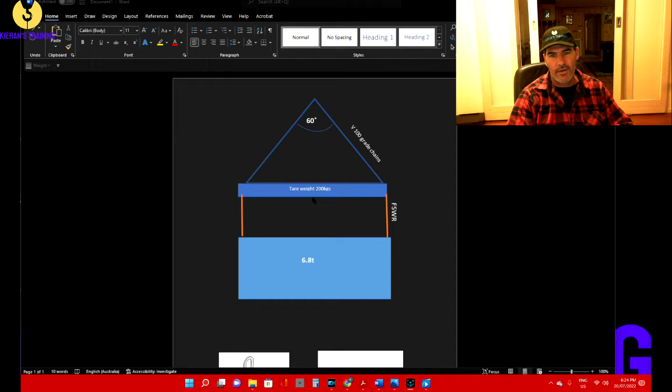Alright, here we go. So, in this scenario we've got a spreader bar lifting a load weighing 6.8 tonne. We've got two flexible steel wire ropes underneath the spreader bar, and we've got some 100 grade chain above the spreader bar at a 60-degree angle. So the first one we'll take a look at is the flexible steel wire rope. Now the thing with the spreader bar is if you've got an evenly balanced load underneath it, each side is going to be taking half of the weight. So if we're lifting 6.8 tonne, that means each of these flexible steel wire ropes need to be capable of lifting 3.4 tonne.

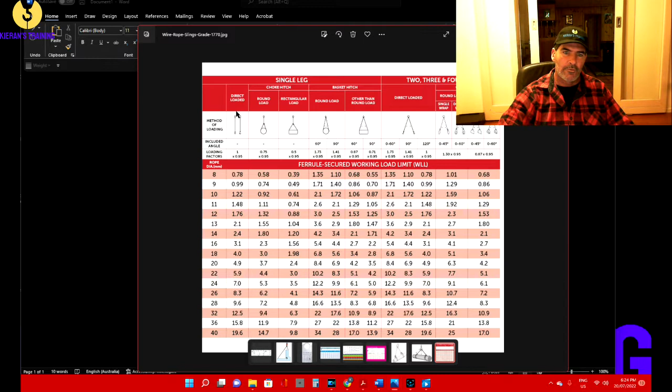So to look at the sling chart to do that, I'll just drag that sling chart across here. So if we look here, it's direct loaded because it's not choked around the load. So just a direct load at the top. Two slings directly loaded, and we just run our way down this column until we can lift the 3.4 tonne. At 16 mil we're good for 3.1, not quite there yet. So we go down to the next one, so 18 mil here means we can lift our 3.4 tonne load. So in this instance we need a minimum of 18 millimeter flexible steel wire rope underneath that spreader bar. So that is the lower slings.

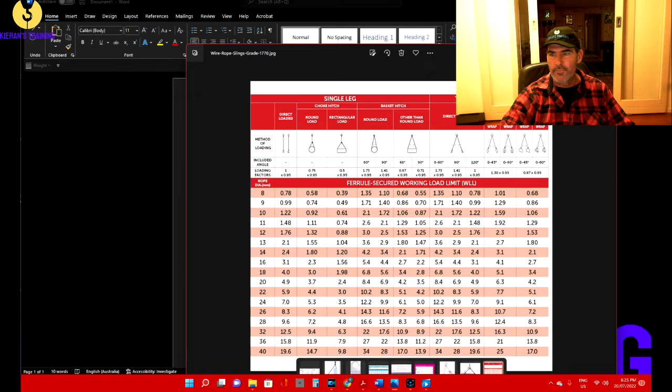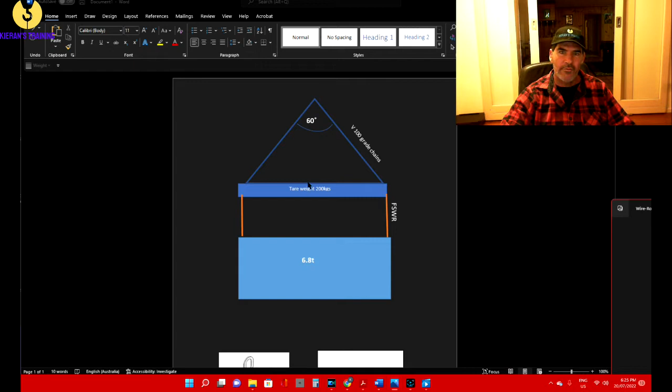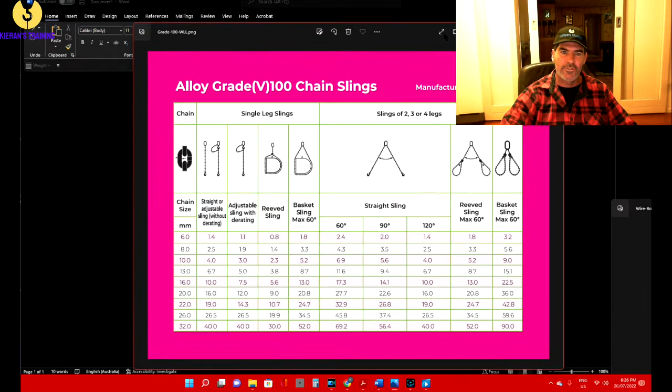So now we'll take a look at the top slings. 100 grade chain, 60-degree angle. When we're looking at the weight of the load, those slings are taking the whole weight. So in this instance we've got the 6.8 tonne load plus we have a 200 kilo spreader bar. So in total we have 7 tonne of weight on those chains. So to determine what chain slings we need, we'll look at the sling chart for the 100 grade chain. When we take a look at this chart here, it gives us a few different variations. In this instance it's directly attached because it's on the spreader bar, and we've got a 60-degree angle.

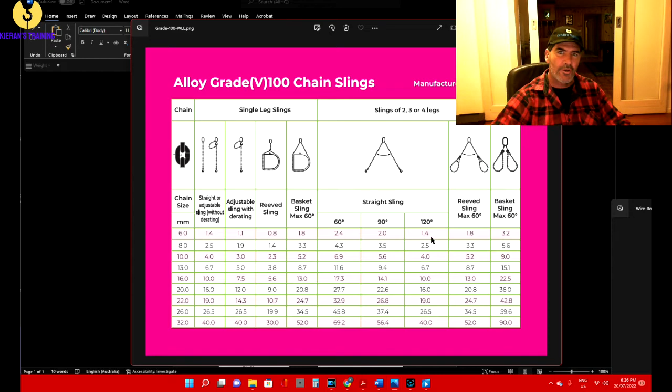So with the direct attachment you'll notice we've got a 60-degree, 90-degree or 120-degree. 120-degree being the maximum allowable angle between two legs of a sling. Now over here where you've got reeved slings, you'll notice it only has 60 degrees because if you have your slings choked around the load, 60 degrees is the maximum allowable angle. So we're over here, we've got a straight attachment at 60 degrees.

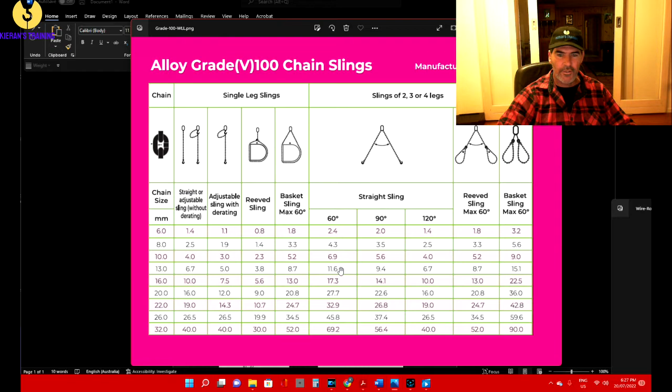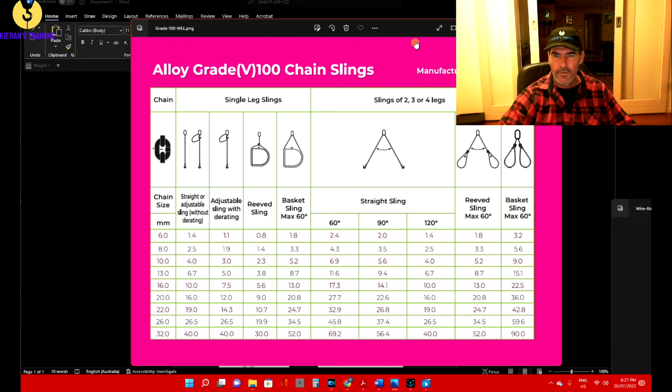So we just run down this column here, straight slings at 60 degrees, and we run down until we can lift 7 tonne. We can see the 10 mil can lift 6.9, so we're not quite there yet. So we go down to the next one, and our 13 mil 100 grade chain can lift 11.6 tonne. So the slings required to lift that load on top is going to be 13 millimeter. So it's nice and straightforward, that one. So we'll move this back over here out of the way.

To do that, if the pipe's 20 kilos per metre, you go 20 times 5, because they're 5 metres long, and there are 20 of them. So when you're working out the weight of the load, just multiply all three numbers together. 20 times 5 would be 100. 20 times 100 is going to be 2,000. So that equals 2,000 kilograms. Don't forget to put your unit of measurement on there.

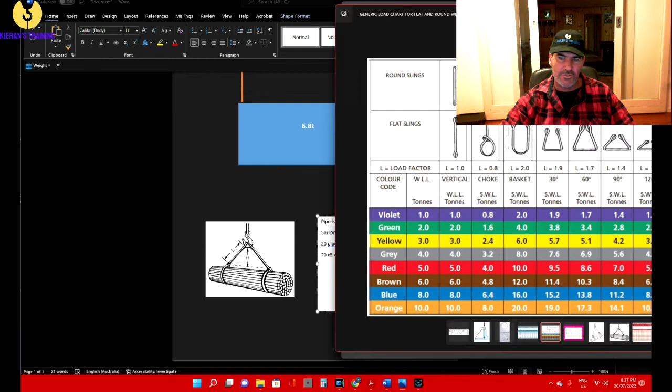So if we've got a pair of softies, and because it's choked, we know we're going to have a 60-degree angle, because we can't have any more than that. We've got to lift a 2-ton load, it's going to be choked, and that's 60 degrees. So we'll bring across our sling chart for the softies. You've got all your different variations along here. In this instance, we've got 60 degrees and choked, so we're looking right here.

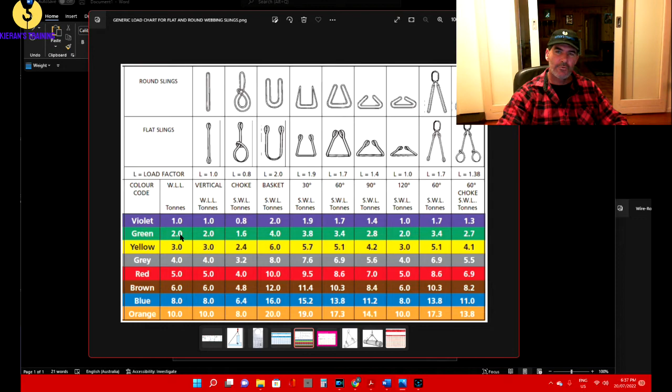So what size slings do we need? The 1-tonners can't quite do it. If we go to the 2-ton, or your 2 right here, we can lift 2.7 tonne. Slide back across, and that tells us they are 2-ton slings. So in order to lift this load, we're going to need a pair of 2-ton slings.

Now just take a look at this little diagram. You'll notice they've only got a single wrap on it. Just remember, if you are going to be slinging any loose items, always make sure you double wrap those slings, just to prevent the slings from slipping. If they're not double wrapped, you will find those slings will actually slide in on you. The load can become unbalanced and start falling out, which is never a good thing. So there's your softies.

Let's have a look at some chains. Let's just close that one off and see if I can find the right picture. Here we go. So when we're looking at a chain sling tag, if we've got this arrangement, let's say we have 90 degrees between the legs here on the diagonal. You always look for the greatest angle between any of your legs, and that's going to determine what angle you're going to use when determining the capacity of the chains. I will just find the, here we go.

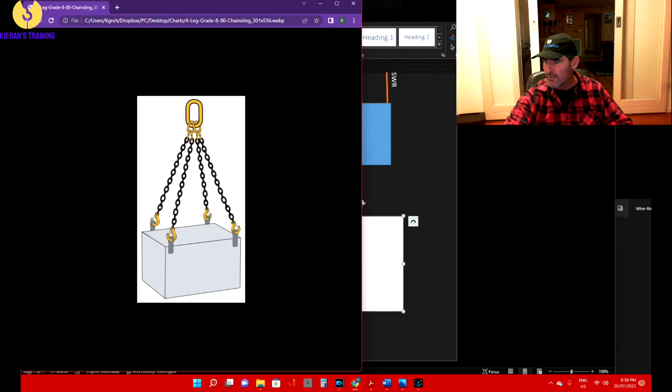So, I'll just put that to the side. Alright, so if we had 8mm chains directly attached here, and a 90-degree angle across it, then we're going to be looking at our sling tag to find out how much we can lift with those chains. So in this instance, you'll notice on a sling tag you'll have the grade of chain, so in this instance it's 80 grade. It's going to have the diameter of the chain, it's going to give you your different angle factors, and your choking factor if it's rigged around the load as well.

As with all lifting equipment, it's going to have a serial number or some form of ID on it, so you can put that into the lifting register and identify it. So 90 degrees, directly attached, means these chains can lift 2.8 tonne. If it was choked, you can lift no more than 2.6 tonne, because being choked, 60 degrees is the greatest angle that you are allowed to use. So that was just a quick look at the flexible steel wire rope, the synthetic and the chain charts.

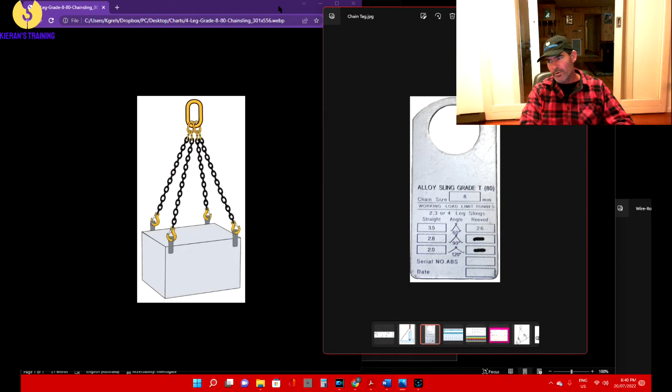I just want to have a quick look at if you're lifting something with different length slings or chains, to decide what angle you're going to be using. So where's this other diagram I had? Here we go. So if we've got something like this, let's see if I can make that a little bit bigger for us.

So we've got an asymmetrical load, so when we look at our slings at the top, we're not going to end up with the same angle. So if from the center line that was a 30-degree angle from here to here, then you'd use a 60-degree angle, but let's say it's 45 degrees to this one. So if you've got two angles there from the center, one's at 30, one's at 45, you're always going to use the bigger one because that's your weakest point. So if that's a 45-degree angle there, then if you had two of them, it'd be 90 degrees, and 90 degrees is the angle you're going to use to work out how much you can lift in that situation.

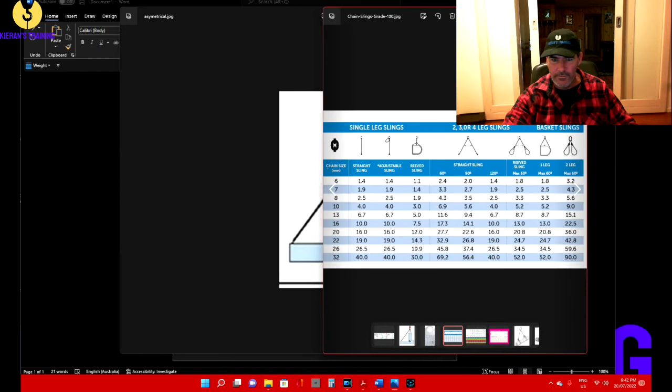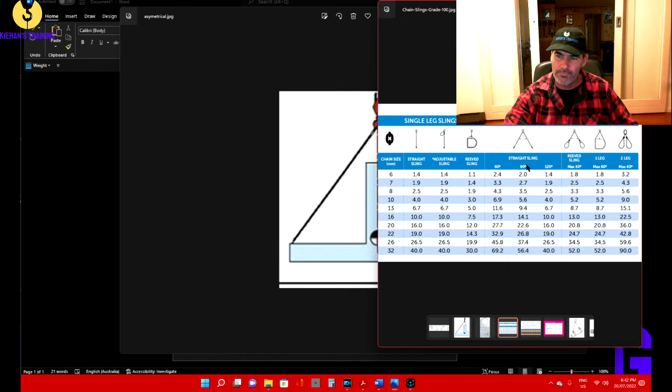So let's say this load weighed 7 ton. Let's bring our chain chart across again and we'll have a look at that. Where are we? Okay, I've got the synthetics. There we go. So once again it's a direct attachment, and we said it was 7 ton. Now we're using 90 because that is the bigger angle. So remember, if we had 45 here and 30 here, we'd go for the bigger angle. So 2 x 45 is going to end up giving you a 90-degree angle, so we're going to look at 90 degrees.

So if it's 7 ton, we run down our chart here, and here we go. We've got the 13mm chains that can lift 7 ton at 90 degrees. So that was just a quick wrap up on how to select the slings you're going to use. Now once your slings have been selected, obviously you're going to need to inspect your slings. I've recently done another video on inspection of slings if you want to go and check that one out as well.

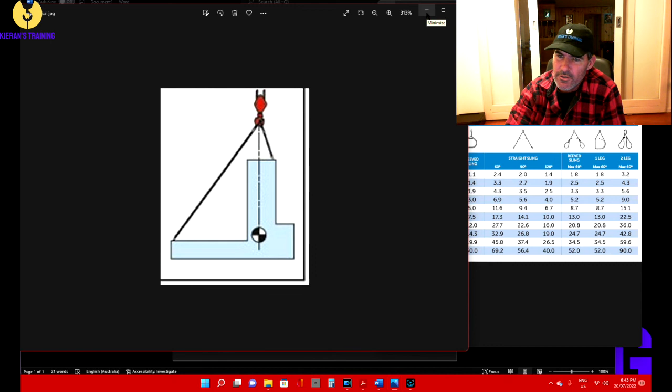Now keep in mind you still need to be able to work out the weight of a load, and one that you're still going to have to remember for the dogging assessment is to work out the weight of a pipe. If you want to jump back over to my other video on dogging calculations, you'll be able to find that formula in there as well. Quite a simple one, pi r squared times length, inside diameter, outside diameter, to work out the weight of the pipe.